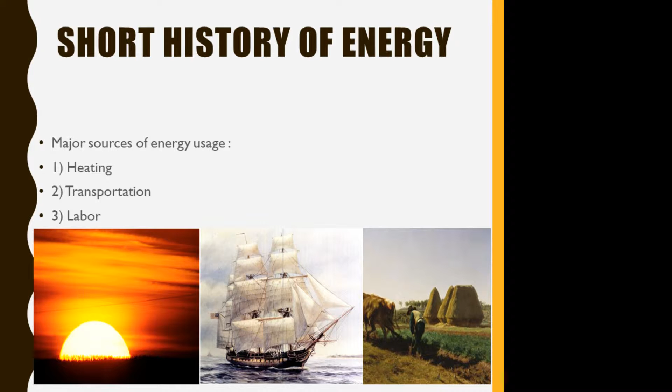It was only around the 17th, 18th century that people invented steam engines. A great irony happened in 1880 when the first electric generator in the world was powered by steam engines that were actually powered by coal. So the first electric generator in the world was powered by coal. A year later in Wisconsin, they invented a hydroelectric plant.

It was at the end of the 1800s, beginning of the 20th century, that we found out about petroleum, so we could shift from only relying on the sun as our main source of heat. For labor, we were still on animals, back to the steam engine. For heat, we finally found fire, and then we found petroleum. And there's the irony of electrical generators being powered by coal.

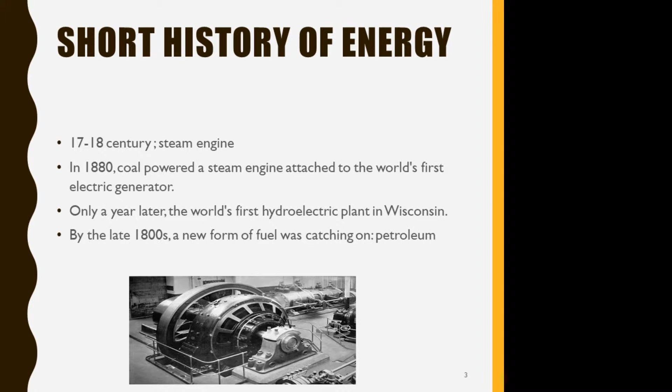There are 10 sources of energy that I could find out there: solar, wind, geothermal, which is energy from the core of the earth, hydrogen, tidal, and wave. Those two are a bit different in that tidal devices are installed close to the shore to take advantage of tidal forces, whereas wave devices are installed mostly inside the ocean. Then you have hydroelectric, biomass, nuclear, and fossil fuels. So we have 10 sources of energy now compared to only one source, the sun, that we were harnessing at the beginning.

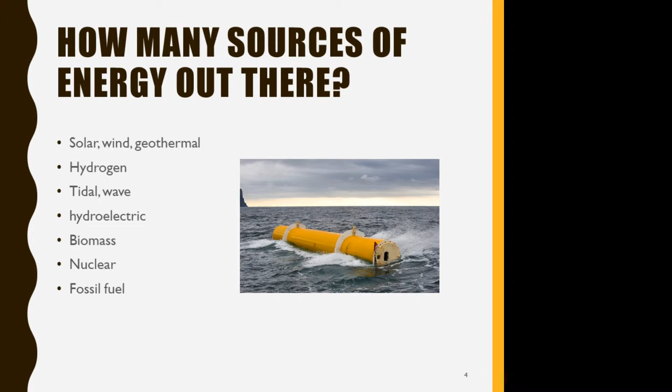Our primary source of energy has been fossil fuels. The pros are that it's pretty well developed, it's cheap, and it's reliable. The cons, I think the biggest con would be the subsidy that governments are paying.

This number is for the US government. For all the talk about climate change being bad and that we should do something about it, the US government is still paying $4.22 billion subsidizing fossil fuel companies, as opposed to paying $1.2 billion for solar energy. So it's a huge gap. I could not find any reason for it except lobbying. So those would be the cons.

So for commercially used renewable energy, since we don't have time to go through all 10 types, there are a couple of types that are being used. Based on the statistics we got, wind, hydropower, solar, and marine are the top 4 producers of energy currently from the renewable sector. We're going to go through all of them quickly, and our project is going to focus on the last part, the marine part.

The advantage of wind turbines is that they do not really contribute to global warming, so that's good. But the biggest problem they have, I think, is the initial cost. It's very expensive to install them, and their lifespan is also not very long, around 15 years. So after 15 years, you have to put more big money into it.

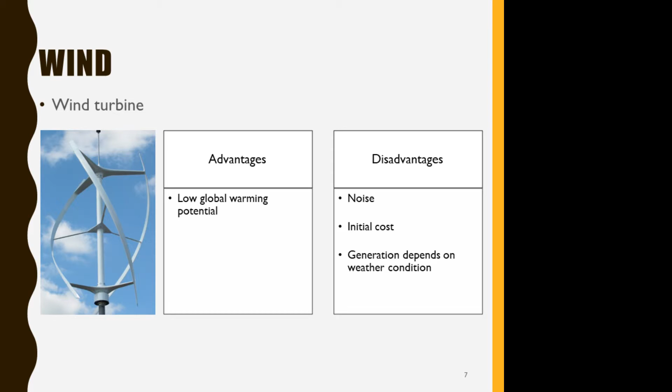The second one is hydropower. What hydropower shares with wind power in terms of limitation is again the location, because you cannot have it just anywhere - you should have a dam, a lake, and all that. The good thing is it's green energy and affordable after construction, but it has an even higher initial cost than wind energy. So both are very expensive to start, but not so much afterward, and hydropower has a much longer lifespan than wind turbines.

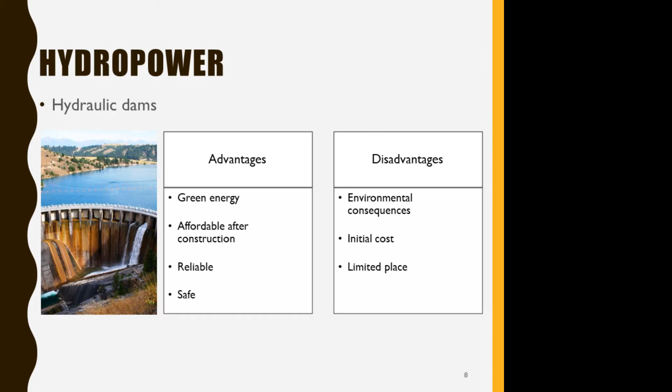And then we have solar. The advantages are long-term usage and low maintenance cost, and like probably all other renewable sources, it has a high initial cost because it has to be engineered. And again, it's weather dependent - for example, in Korea, you cannot have it at all places. It depends on the location where you can actually install it.

It also has energy storage problems, because in Korea the government has set a certain degree of efficiency and production they need to reach by 2030, and they're having a difficult time reaching that. So they have started putting floating solar panels in their sea.

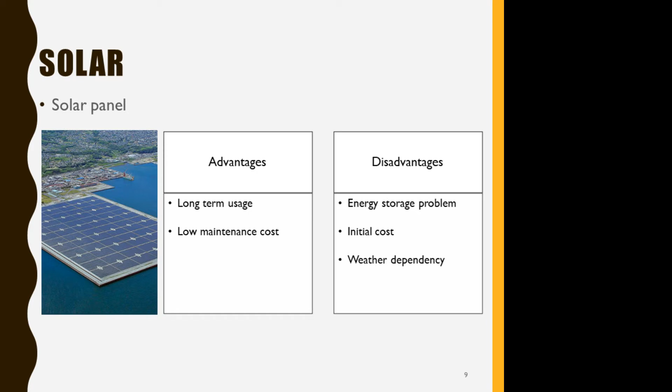Now about tidal energy, and marine energy, which is going to be the topic of our discussion and our project - the advantage is that you can use it for a very long time. It's not like the wind turbine that after 15 years it goes away. It has a much more predictable energy output, so you would know what you would get at the end.

I would say the biggest disadvantage, from what I researched, was the initial cost. But the initial cost of this is still less than wind turbines.

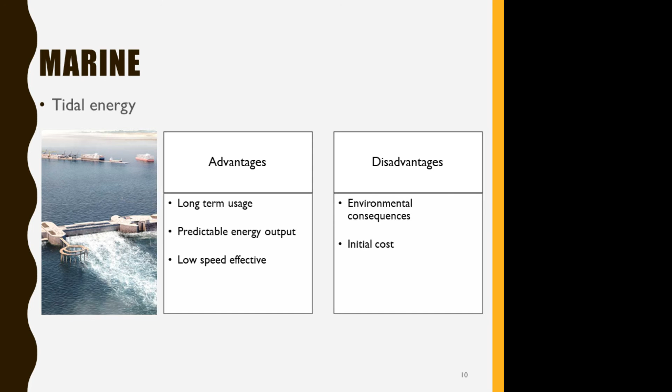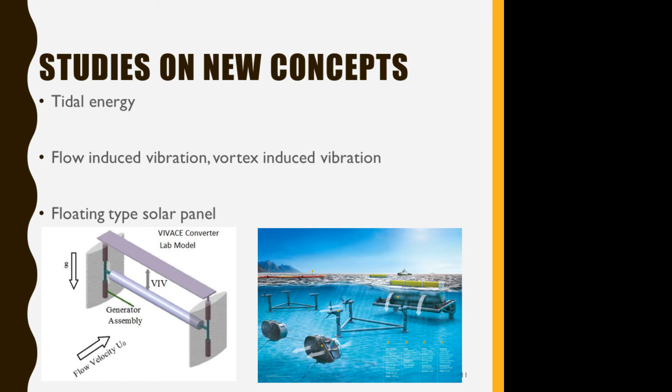There are a lot of other studies on new concepts trying to work on tidal energy - one of them is flow-induced vibration, vortex-induced vibration, and the floating type solar panel I mentioned in the previous slide. The biggest problem with developing technologies for tidal energy is that the actual physical presence of these projects has the potential to alter marine life, the life of mammals within the ocean. So that's a big problem.

Another problem is that it creates an electromagnetic field, which also creates environmental issues. So these are the two big problems, and both of them are obviously environmental issues.

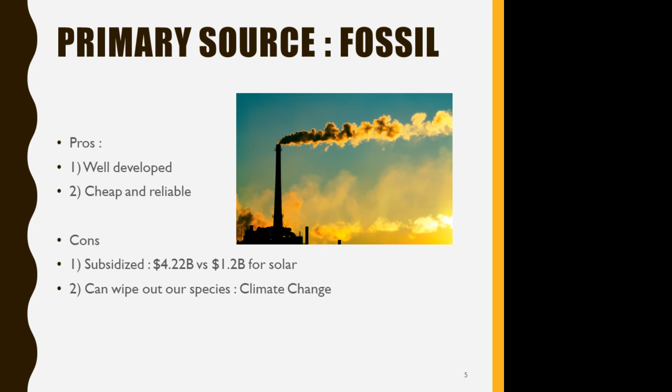So our goal is basically to look at these projects that people are developing and do a survey on the academic papers to understand what the big problems are, then look for the shortcomings in those papers, and finally try to ideate potential solutions from these academic journals. So our project is going to be mostly analytical, abstract, and journal based.

For our second presentation, we're going to look at the issues associated with marine power, then study and analyze the existing solutions for it. After that, once we understand the shortcomings, we're going to brainstorm and try to come up with ideas to address those problems in academic journals.

So that's the end of our presentation, thank you for listening. Any questions?